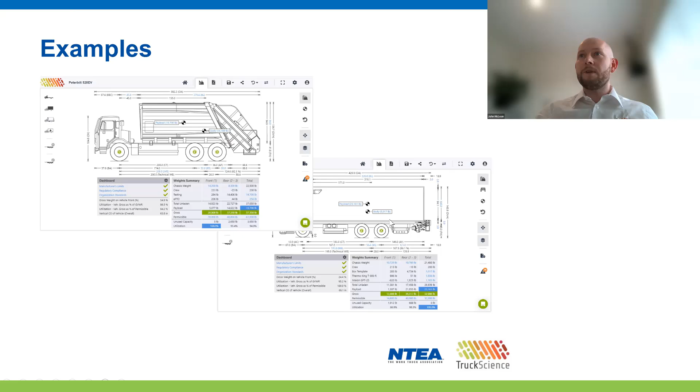Okay, so as I just mentioned there, we'll first design a garbage truck operating in California. So I'll need to set up the regulations to validate against this. So I'll go up to my settings wheel and I'll go here to regulations applied and I'll search for California. But as you can see, 50 states are catered for at an interstate level, and a lot of states are catered for at a state road level as well. We're constantly adding new ones on request, and we have also recently released all of the Canadian provinces.

So I'll just search there for California. Oh, sorry, I'll clear the list first, and I'll go for California state roads. And you can see here it's also possible to pin attributes that we might be interested in. So currently I've pinned the gross weight on the vehicle front as a percentage, and the gross as a percentage of GVWR, and the gross as a percentage of permissible there as well. And we'll check into that later on in our examples.

We can also define ranges for particular attributes that our organization is comfortable with. So for safety and traction, we might have an internal limit we adhere to on the gross weight on vehicle front. So we can set that between, say, 20% or 100% or whatever you need to set it as. I'll leave that as is actually for the later examples, and I'll click OK for that. Okay, so as I mentioned there, I will select a Peterbilt 520 6x4, and I'll go for the EV version of this spec.

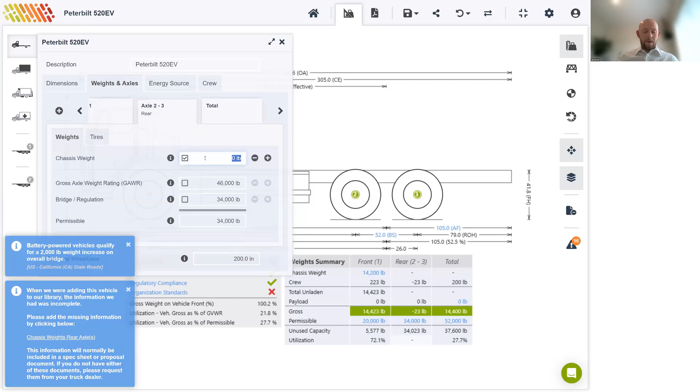Okay, so now let's familiarize ourselves with the workspace here. So straight up here, we have a notification that the front and rear chassis weights of the default spec have not been provided by the manufacturer. So this varies between manufacturers. Some provide the weights on their bodybuilder portals, which we then include in the software, while others prefer you get them directly from the dealer. We cater for either scenario, so I'll go ahead and just pop these weights in here. So the front axle weight, I'll go for 14,200 pounds, and our rear 8,300.

Okay. You'll notice the weights are quite a bit heavier than the equivalent diesel spec, and we'll see how that impacts the overall payload of this vehicle later on. I have another notification down here that this vehicle has an additional 2,000 pounds allowance in California because it is the battery electric spec. And I can see that this has already been applied to the total permissible over here. For diesel-powered vehicles, the limit will be 50,000 for this particular overall bridge distance.

Okay, so apart from this weights table on the right-hand side of the dashboard, other items we can note here are the compliance indicators. These give us visual feedback on whether the design complies with what we call our three pillars of compliance, which is the manufacturer's limits, the regulatory compliance, and the organization standards. So those organization standards are internal quality or safety standards that are not enforced by law, but are nevertheless desirable metrics to implement on a build. So as expected, these are all green. And I'll just click in here so you can see the data points that we pinned earlier. So there's our regulations like California, and our organization standards are there as well.

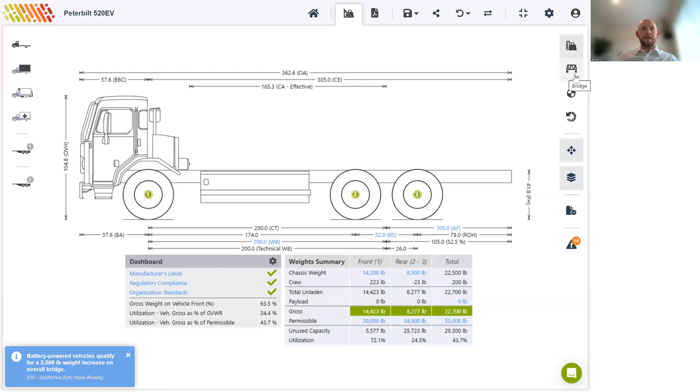So on the left-hand side here, we can see our menu where we can add our bodies, equipment, payload, and different trailers. On the right-hand side, we can toggle between different views, such as bridge view, the center of gravity view, and also our smallest turning circle here.

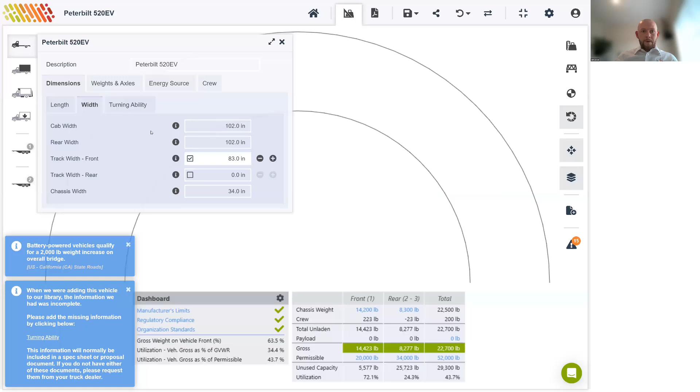Okay, so we can see the turning radius has not been supplied by the OEM on their bodybuilder portal. So I'll just add this now because we'll need it for later. So I'll add our track width on the front as 83 inches. And for our turning ability, we'll change the inner steering angle to 40 degrees. Sorry. There we go. Okay, you can see there it's now loaded onto the drawing. Just remove this. Okay, so I'll go back to my side view here.

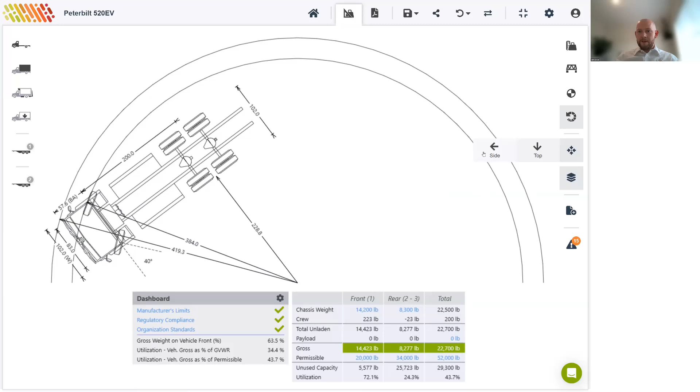Okay, now since this is a vocational truck, and we don't have a traditional PTO from the transmission, we might need to add an ePTO to power the garbage body we're planning to add. The chassis provided by the dealer might well come with this pre-installed, but I'll add one now using one of our templates. So I'll go into our equipment here.

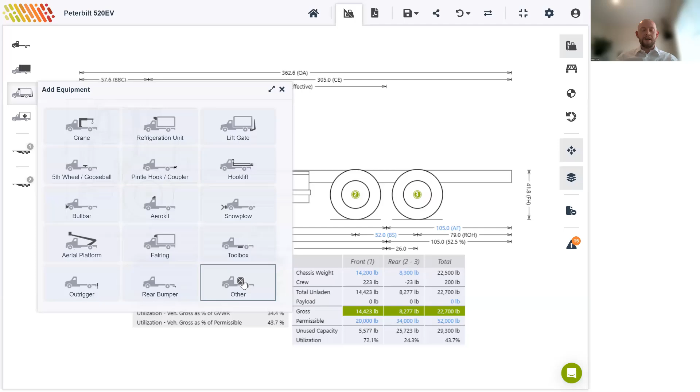I'll go to add equipment. You can see we have a whole different range of equipment that you can add. But for now, I'll just go down to other, and I'll add a template. If I had a DXF drawing of an ePTO, I could have imported that also to make the drawing more realistic. But using a template gives you perfectly accurate results.

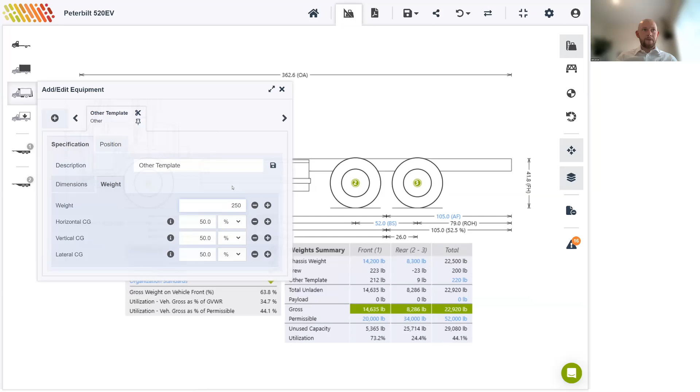And I'll just adjust the dimensions of this. So I'll say the length will be 16 inches. Our height will be 27 inches. And our width, 20 inches. And we'll change our weight to 250 pounds. And I'll just position it here on the chassis. And just as I do that, just keep an eye on the weights table and notice how it updates on the fly.

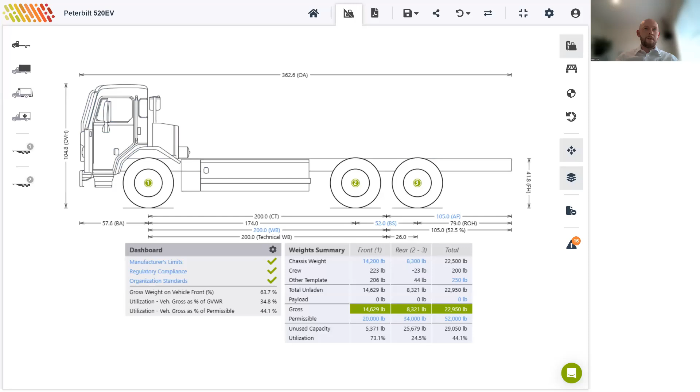So I'll place it about, say, down a little bit. Sorry, I'll push it up a tiny bit. And sorry, a little bit more. Okay, so next I'll add a body, and I actually have a DXF drawing here, so I'll go ahead and import it. I'm sorry, I'll just give that a name as well. So you can see it comes up in the weights table as other template, but I'll just give it ePTO as a name. So it comes up nicer in the weights table.

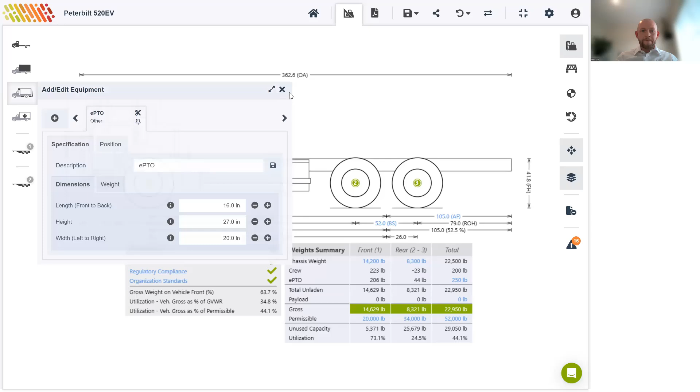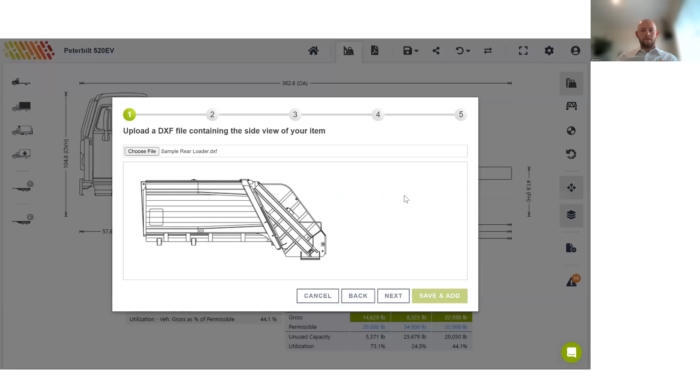Okay, so now we'll add that body, which is a DXF drawing that I have. So I'll go down to add body, go down to garbage truck, and import our DXF. I'll choose my file, which I have here. Yeah, that's good. I'll drag it down onto the XY axis here so it imports correctly onto the drawing. Click next. For our length, we'll go for 279.6 inches. The height is auto scaled according to the length, so I don't need to adjust that. I'll go for my width here, which will be 96 inches.

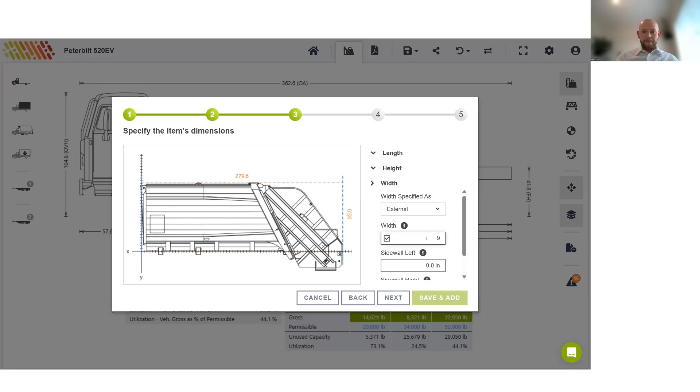I'll click next. And our body weight will be 14,700 pounds. Our horizontal center of gravity, we can actually specify that in inches. So I'll go for inches and I'll go for 151 inches. The vertical center of gravity, we'll go for 30 there. Lateral center of gravity, 50 is fine for that. Our horizontal center of gravity of the payload, we'll specify that in inches again. And we'll go for 103.5.

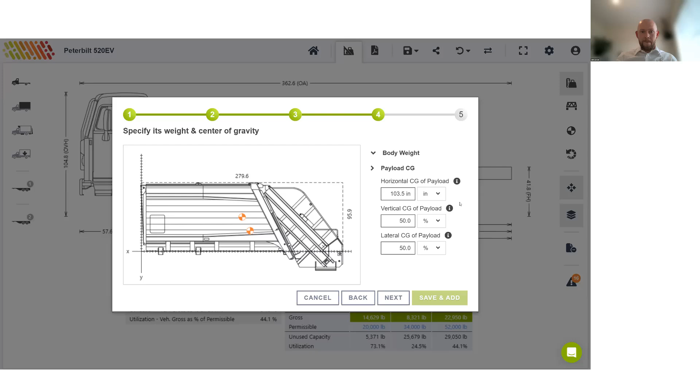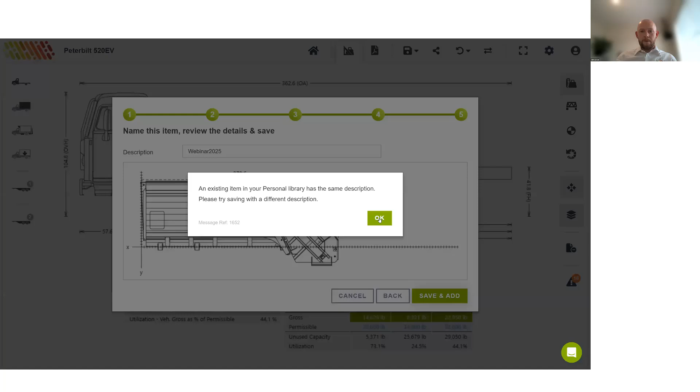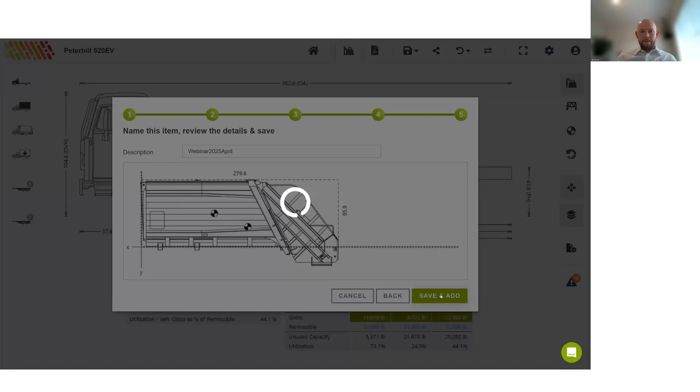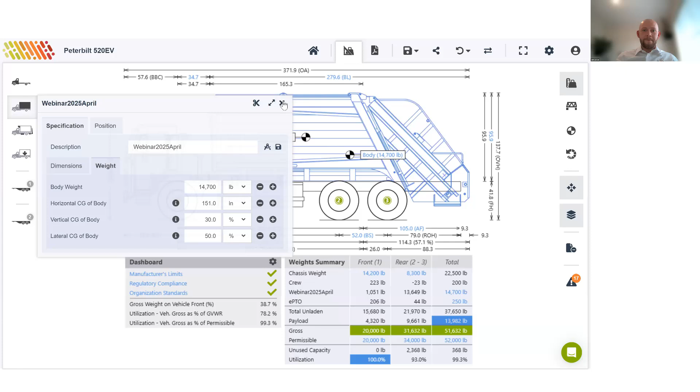Next, and we'll save it. So I'll save it as webinar 2025. And we'll click Save and Add. Well, I'll just change that as well. Oh. Oh, I may have adjusted that body weight to be, yeah, sorry, that's 147,000 pounds, which is not correct. So I'll bring that back to 14,700 pounds. Okay, that makes a bit more sense.

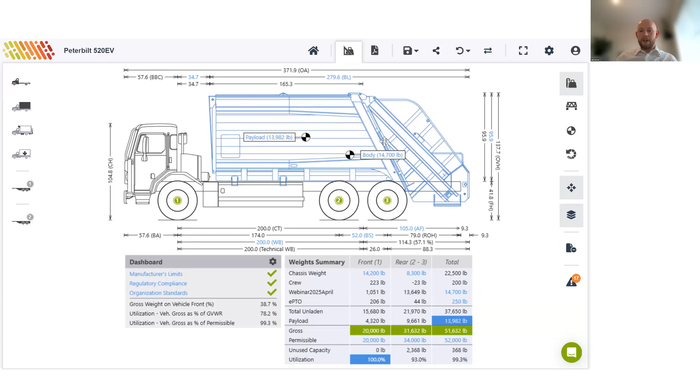Okay, so now we've got that there in the drawing. We can see from the weight table here that our front axle is fully utilized. And there is definitely some excess unused capacity there on the rear and also on the overall. So let's drag this body back a little bit. But just before I do that, we'll keep note of the payload here. That's just under 14,000 pounds. So drag it back a small bit.

Okay, a bit too much, I'd say. Okay, now we're fully utilized on the total row, and our payload has jumped up now to 14,350 pounds. And now we're fully utilizing that extra 2,000 pounds allowed for EVs in California.

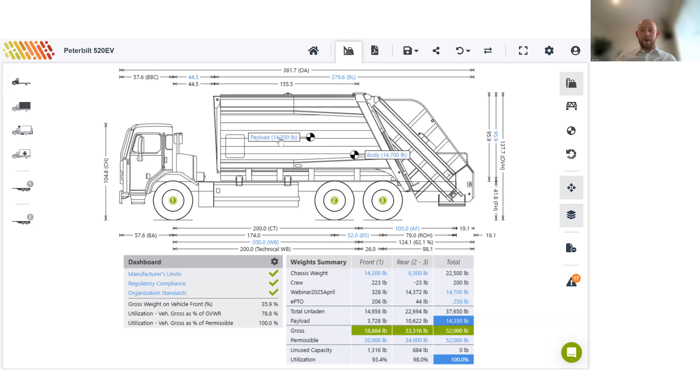So up to now, the software has been auto-calculating the minimum legal payload. So as an experiment, I'm just going to lock the payload and see what happens if we drag the body away from its optimized position. So I can lock it here by clicking that. And we'll note now when I drag the body in either direction, that the vehicle becomes overloaded, and that is indicated by our compliance dashboard there as well.

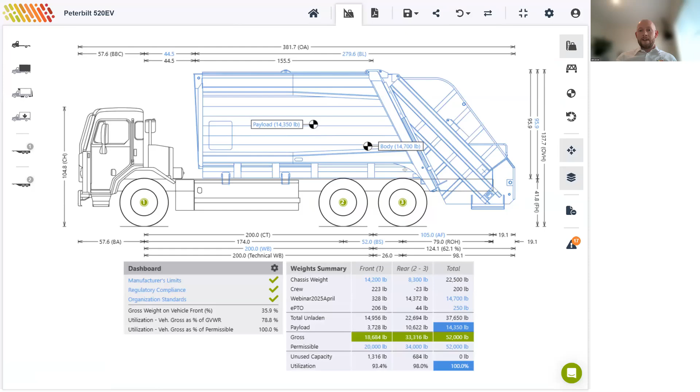I'll go back on full screen, sorry, and I'll undo that change. Okay, so now that we've positioned the body, we need to reduce that after frame there to suit. So let's do that. I'll just go down to my after frame and I'll change that to 56 inches. Okay, and I'll also update the cab to body here, and I'll change that to 45 inches.

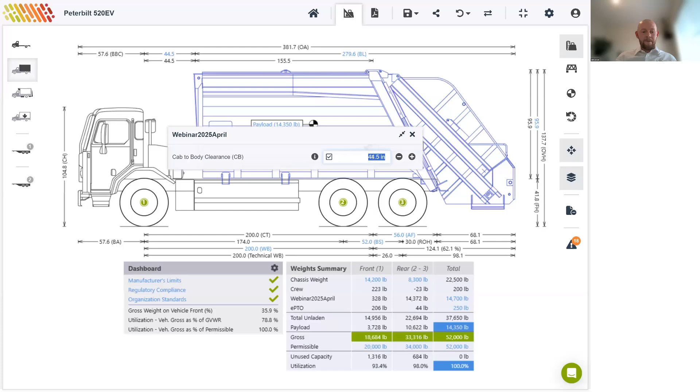Okay, so now if we look at the data points we pinned earlier here, we can see that we're full utilization here on the permissible, but we have some excess on the GVWR. So let's unlock that payload again. Go back to payload, unlock it, and we'll change it to a state with less restrictive regulations like Colorado.

So if I go up to my settings wheel again, and I clear that, and I'll type in Colorado. All right, spelling's not great today. Colorado State Roads. Okay.

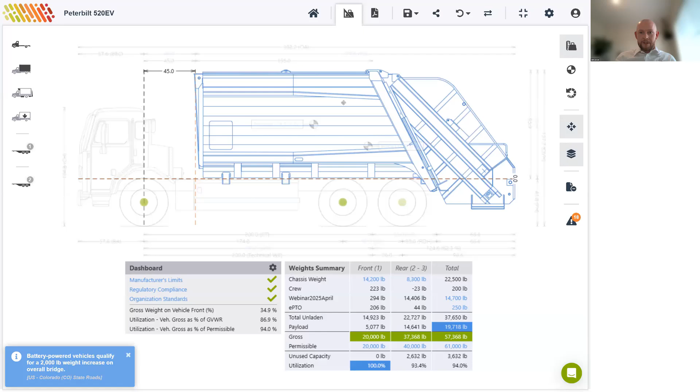Okay, so we can see there now the payload was 14,000 pounds, and now it has jumped up to just over 19,700 pounds. But again, we can see that the front axle is still the limiting factor here, indicated by the 100% utilization score. So if we move the body towards the rear by just a few inches, we can see.

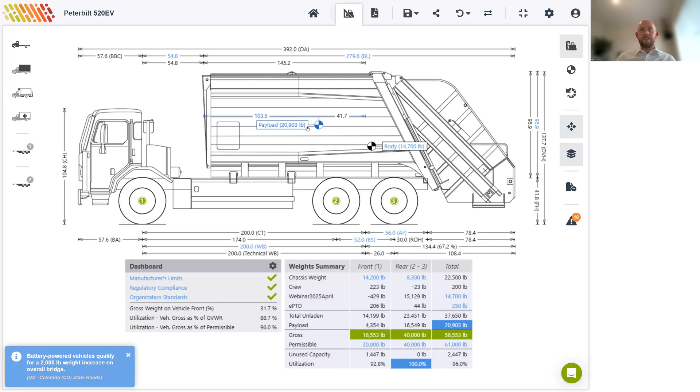So moving the body towards the rear to gain more payload does not necessarily make operational sense though, since this will increase the vehicle's swing out, which could potentially be a safety issue for a truck operating in residential areas. So I'll just go ahead and undo that.

So because this vehicle is operating in residential areas, it also needs to be maneuverable. So having that small turning radius here is desirable. The shorter the wheelbase, the smaller the turning radius. But the shorter the wheelbase, the smaller the weight allowance we'll get on bridge. We populated the turning radius data earlier, so we can have another look at the details now and configure our ideal wheelbase.

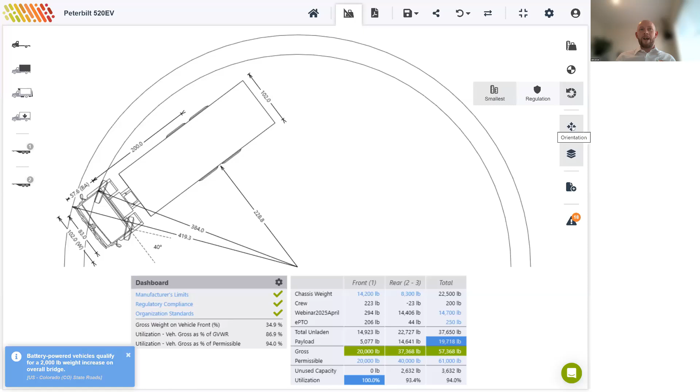This is a bit of a trade-off, but in this case, we are prevented from reducing that wheelbase further because of the location of these batteries. This is often the case with EVs.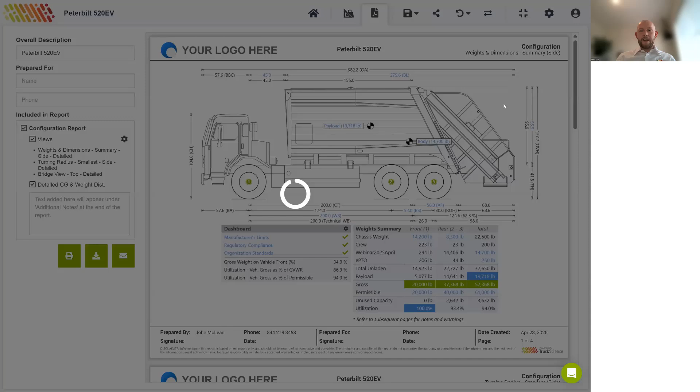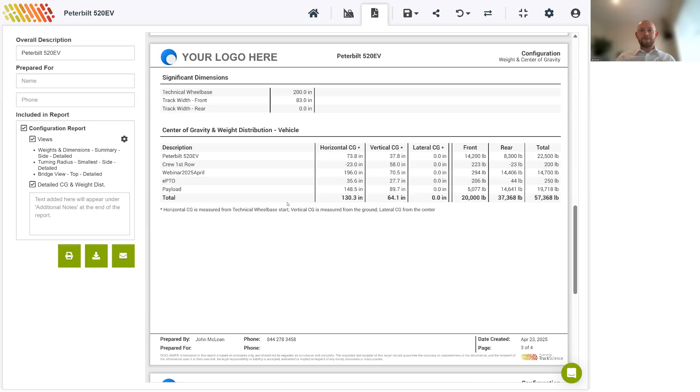So if we're happy with this vehicle, we can go ahead and generate a PDF. You can add all your relevant views to that PDF, and it has all your different information on there as well, like your regulations applied and your manufacturer's limits. That's the end of example 1 anyway.

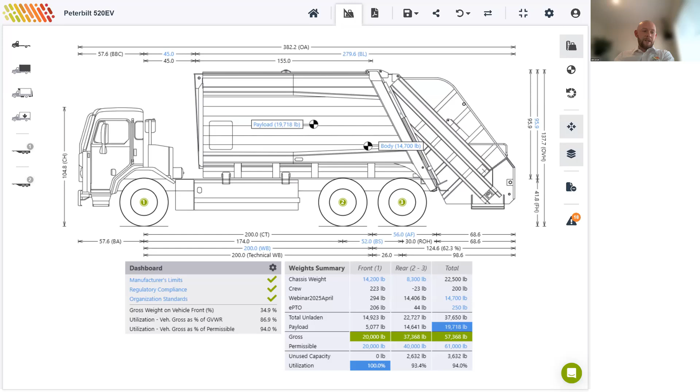Okay, so I'll just move on to my second example here. So for the next example, I'll need to go back here to home. And we'll design a refrigerated truck for use in California again. So I'll go back up to the settings wheel here and change Colorado back to California State Roads. And I'll keep these data points as they were on the previous build, as they'll be relevant again.

So okay, and I'll go for our Lion Electric 6x4, and I'll go for the Lion8.

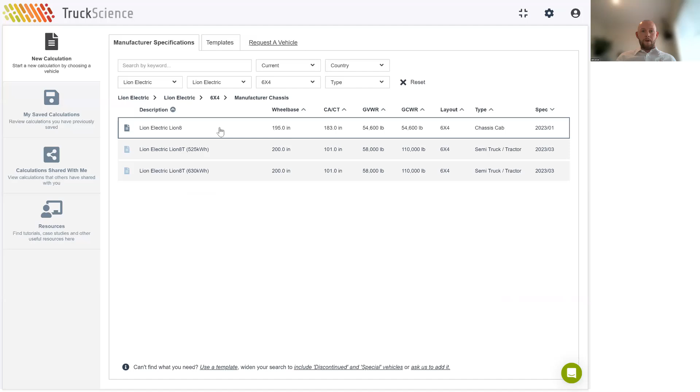Good. So note that these default weights now have been shared by the manufacturer, so they're already populated there. And also we have that note again that we've an additional 2,000 pounds allowance for this vehicle. And we'll get back to that later on.

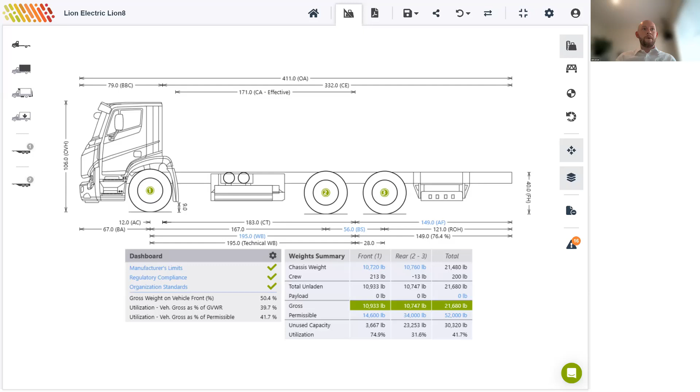So we'll add our body now. Second. And I'll add a template, so a box body. And we'll add our fridge unit as well, so we can go back to our equipment and we'll go to refrigeration unit at the top there. Skip past it. And I'll search for our Thermo King T800.

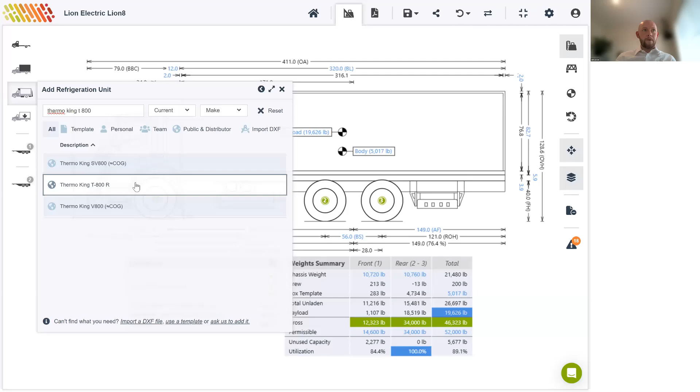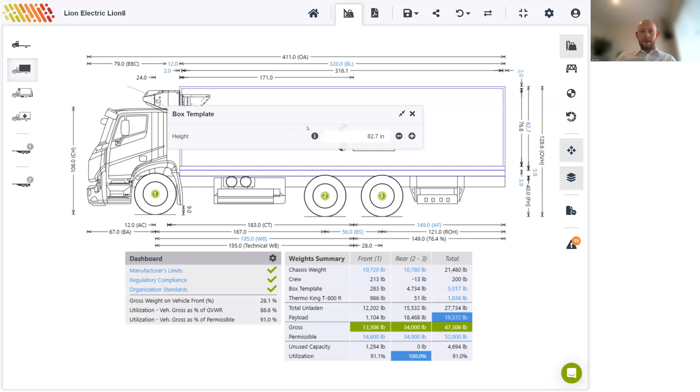Okay, so we can see there immediately that this unit is going to interfere with the cab. So we'll need to increase the body height to address this. So if I go over here to body height, I can change this to 100 inches. And there now we're clearing that cab.

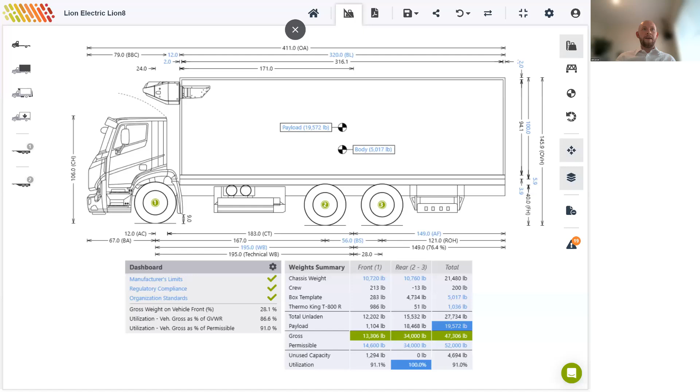So I'll also add a lift gate here as well. So again, we'll go back to add equipment, lift gate, and we've a lot of different options there to choose from as well, but I'll go for a Maxon. I'll add that on as well.

Okay. So now that our configuration is complete, we can take another look at the weights table. Down here, we can see that the app has auto calculated the maximum payload for this vehicle in California to be 17,500 pounds roughly, which is highlighted in blue here. The other figure highlighted in blue is the utilization on the rear axle. This means that we aren't taking full advantage of the 2,000 pounds additional overall allowance for this vehicle, since the gross is only at roughly 46,000 pounds.

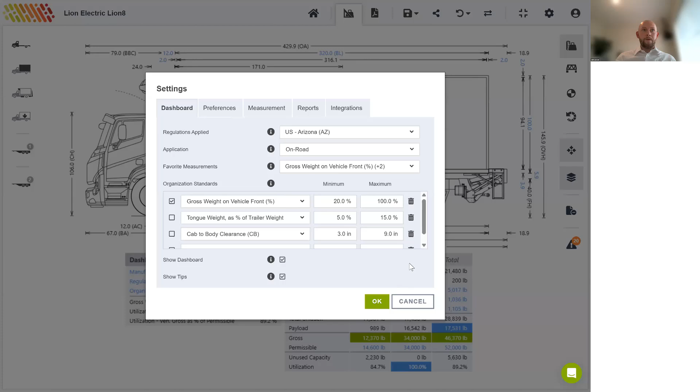So due to the relatively heavier rear axle weights on EVs, this is quite a common scenario. And some states like Arizona have started allowing additional weight to be spread over the axles for EVs, in addition to the overall allowance. Let's try switching here to Arizona. Just click here to California and clear that to Arizona. Yeah. Let's see what impact this has now.

So again, at the bottom left, we can see the additional allowance provided in Arizona. And if we look at the weights table, we see now that has translated to about 2,000 pounds of payload. So we're up to now 19,651 pounds. So interestingly, we're still not taking advantage of that 2,000 pounds for the overall allowance, as the rear axle is still the limiting factor.

So what would happen if we increase the rear axle allowance even further? So let's try adding another 2,000 pounds over the axles. So I can do this by overriding the Arizona regulations and setting this rear permissible to say 38,000 pounds. Okay, we can see there we got another roughly 2,000 pounds of payload, but we're still not fully utilizing the vehicle. So again, I can bring this up again to 40,000 pounds.

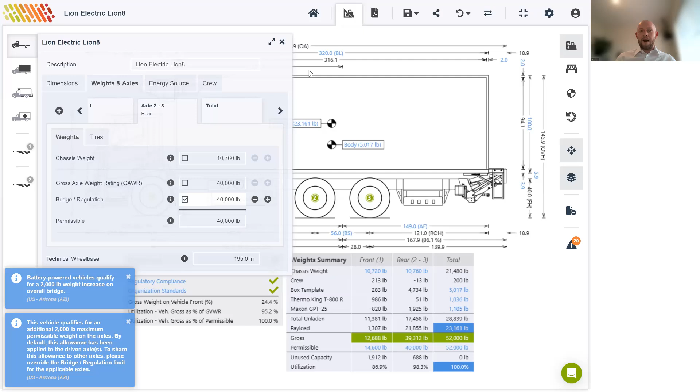Okay, there we go. So if it is pushed up by a further 2,000 pounds there, bringing it in line with the vehicle's GAWR, we eventually take advantage of the overall allowance and bring the payload up to roughly what an equivalent diesel-powered vehicle might be able to carry. So that's that example as well.

Jens, have there been any questions since? Hi, John. Yeah, I'm just busy answering a question there. It's around whether the CG of the truck can be reverse engineered from its dimensions, and the answer to that question is no. The software cannot reverse engineer that. You'd need to reach out to the dealer to get the answer to that question.

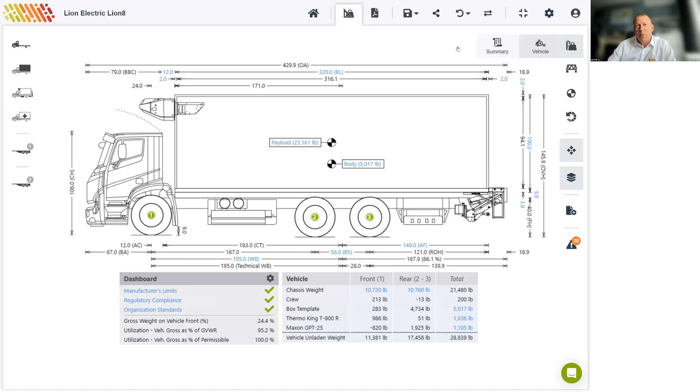In fact, on this example, all of the items are shown, but once we reach a point where the different items are kind of grouped together, you can always hit that view in the top right, and there's an equipment view that lists all the different components up to a limit of maybe 10 or 12 components, I think. So you can certainly drill down there.

The next question is, does TruckScience support Jeeps and boosters for heavy haul trailer applications? The answer is no, we don't support heavy haul. Yeah, and that's something we've chosen to focus more on the up to class 8 without the Jeeps, boosters, etc.

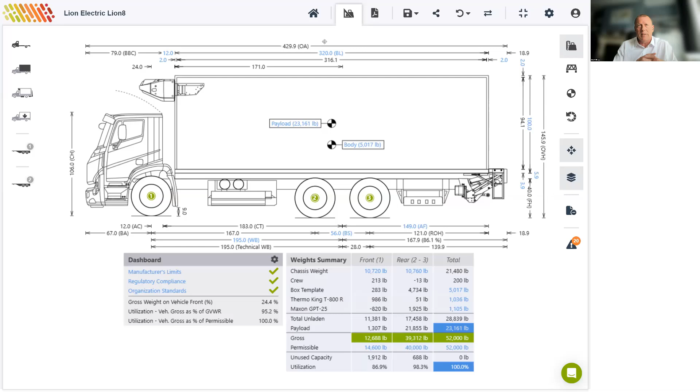The next question is, where can I find the chassis drawing? I'm not exactly sure how to answer that. So the chassis drawings, I'm not sure whether the question is about the bare chassis. I mean, we obviously have an underlying library of chassis where John would have demonstrated earlier, selecting the different brands of chassis. And maybe, John, you can just bring that up again. But otherwise, maybe if that person could just clarify what they mean.

So there you can search for the chassis that you need within our library and bring up the chassis drawing in that way. Are there any other questions or perhaps a clarification on that 'where can I find a chassis drawing' question?

Okay, John, I think that's all the questions. Okay. Thanks very much for the questions. We'll move on. So with the slides, let's go back to the slides. Oh, sorry, John. Another two have come in there.

Perfect. How can we calculate the tongue weight for the trailer attached? So that's a good question there. The software can calculate that automatically. Now, John, I'm wondering, do you perhaps have a saved calculation there with a pup trailer or anything like that? Possibly. Actually, the previous webinar I did have this, a good example. While you're getting that up, yeah. So the tongue weight is calculated, and John will hopefully demonstrate that now in not too long.

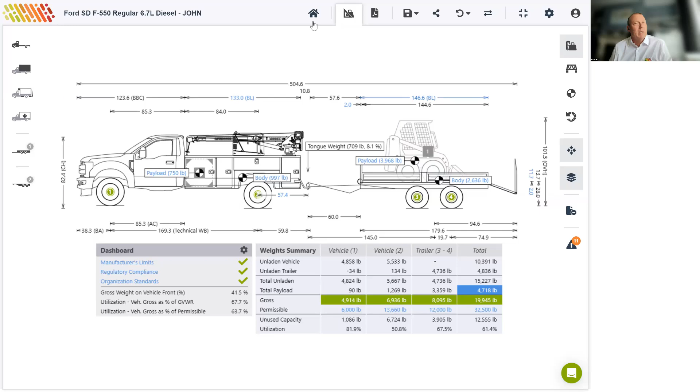The next question is, what are the lightest trucks available in the library? Yeah, I mean, we have a wide range. I suppose the lightest trucks or commercial vehicles. We'd also cater for vans and fairly light duty vehicles. Maybe the person who asked the question could feel free to register for a free trial and even search our library. The trial is fully functional, and you can take a look at the trucks that are available in our library. Unless you have a specific one in mind that John can maybe look up for you.

So there's a question here on Ram truck chassis dimensions, if demonstration available. So John, maybe you can just take a look at the Ram range there. And yeah, we have fairly comprehensive coverage of Rams. I'm not sure now. Maybe you can just open a 4x2. Just search for a 4x2 under axle layout there, and yeah, you can just pick the top one there, and let's see what comes out.

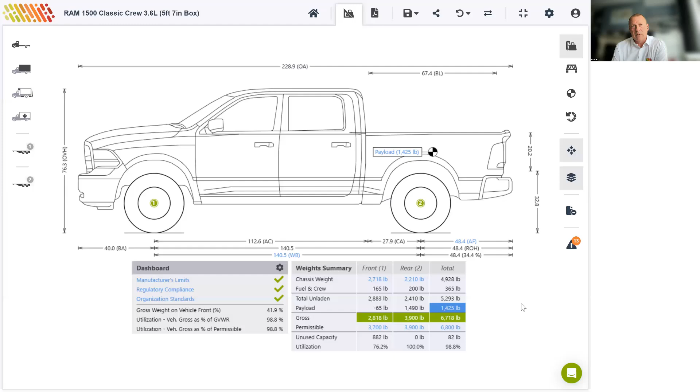So there's another question there. So other than the extra weight allowance for some jurisdictions on EVs, there is not really much of a difference in the EV versus diesel configurations, or can you point out any other differences? I suppose the biggest difference between the EV and the diesel configurations would be the weight of the batteries. So it becomes even more important to make sure you're compliant in terms of axle weights when you're designing an EV.

And then obviously there's also issues around the batteries taking up space on the chassis rail. You'd have to just take that into account when mounting equipment, that you need to mount them differently on an EV when compared to a diesel configuration. I'm not sure if that answers your question. Please let me know if you need more clarification there.

Then there's a question here about, could you please do the same for an F-150 with topper and bed slide and a Lightning? Maybe I'll just make a note of that question, and we can perhaps reach out directly to you and arrange a more detailed demo. I'm concerned that we might run out of time if we delve too deeply into a new build. But we'll make a note of that question, and we'll get in touch after the webinar to arrange a personalized demo.